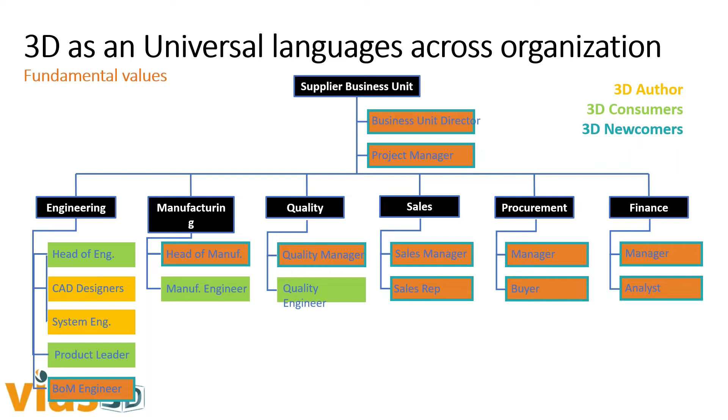And so with the 3DEXPERIENCE platform, again, it's serving these 3 groups of users. The authors are going to be able to access the files they need inside their CAD systems and quickly collaborate and search for what they need. The consumers are going to be able to use 3D, make sure it's the right up-to-date data for the decisions they have to make and the issues they have to solve.

And then we have what we call the 3D newcomers. They're not a CAD user, but they need to have the most accurate information to make those decisions. So the 3DEXPERIENCE platform addresses all these classes of users in the organization.

And so this video that we have here, we're going to be covering the 3 different scenarios. In this first video, we will see an example of how a 3D author is going to use CATIA within the 3DEXPERIENCE. They're going to be able to access it, and there's a problem that has to be adjusted: the parts within the rear suspension of this motorbike.

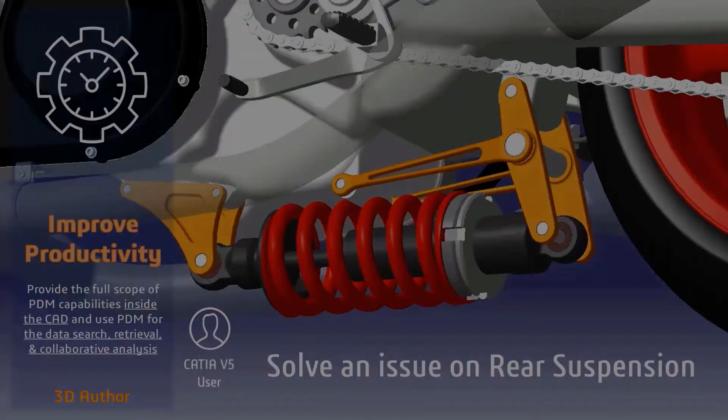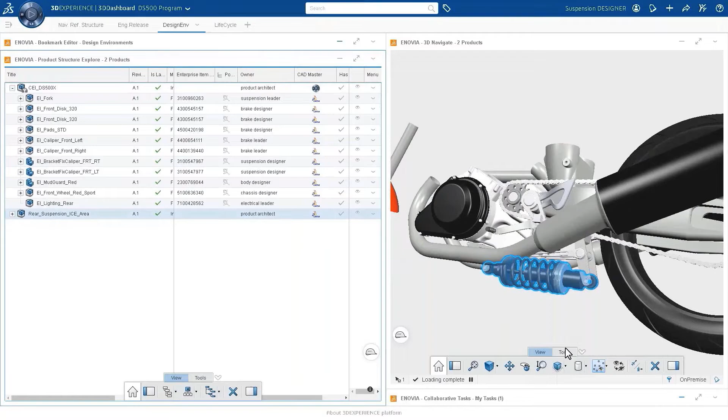So in this step, the engineer has a task to address the problem, and he has to go directly to the data in the platform to review it. So he has to drag and drop the geometry, and at that point, he can look through the product structure to navigate to the areas of concern to find the related objects. And from there, he can search through the Explorer window.

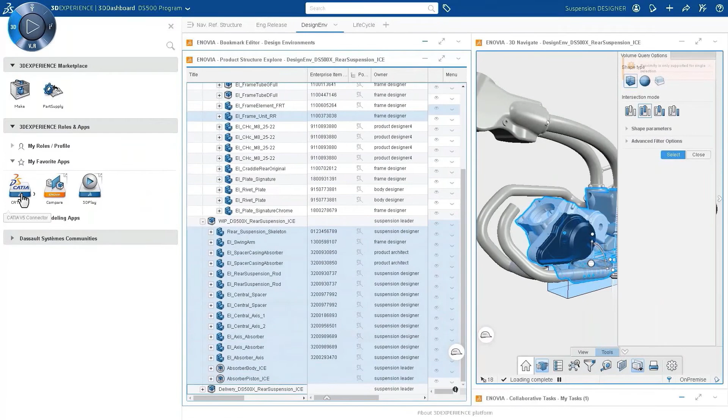And the engineer is going to be able to work in context with a volume filter. It's a powerful tool that allows them to select the components with a bounding box, and the engineer can simply launch CATIA via the app, and he's going to be prompted to select the right information inside the CATIA environment. And so now data is open in CATIA V5, and he's able to begin work. But he notices that one of the parts is not loading properly, so he has to load the new part from the 3DEXPERIENCE.

He can load and unload data from the session without having to leave CATIA to switch back. As he works through, he has visual cues in the product structure, and the engineer notices there's a spacer missing in the current session, and it's an older revision, so he needs to replace that.

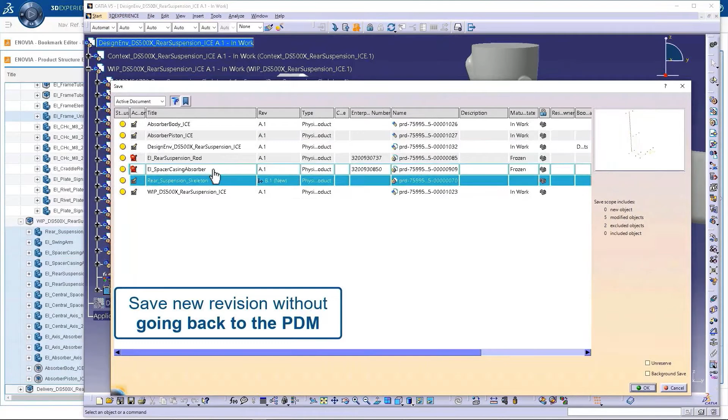The revision engineer has to identify the revisions available and update that. As a new part gets created, a new part number has to be assigned. All of this happens inside CATIA, so the information is visible immediately without having to leave the CATIA session.

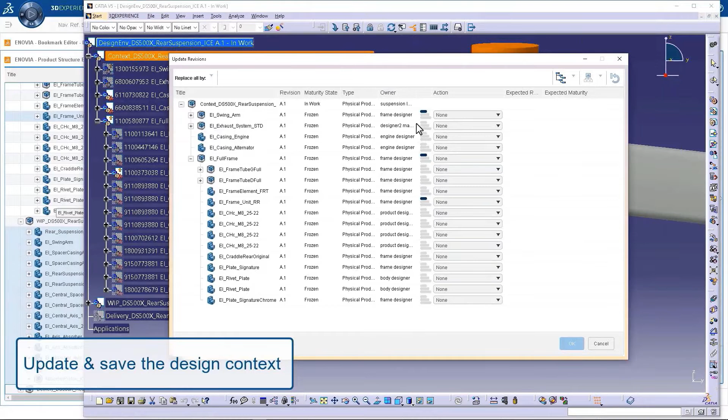Before they finalize their work, they do one last check to make sure the current context has the latest stable revision before saving everything back to the platform. They have to have a permanent record of the work done, so the engineers freeze the design, and that status goes from in-work to frozen, letting all users know this is being done for design review and is stable.

That's just a small sample of the capabilities available for the 3D authors. We have a situation where the engineer remains focused on their work without switching back and forth between CATIA and 3DEXPERIENCE, and it's seamless and trouble-free for engineers to ensure their latest changes are shared in real time with the platform.

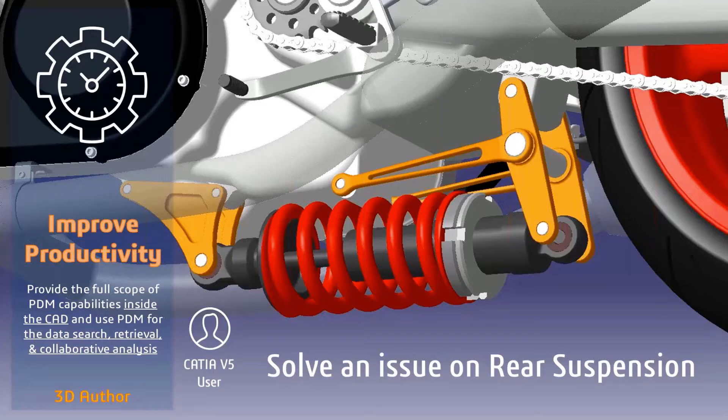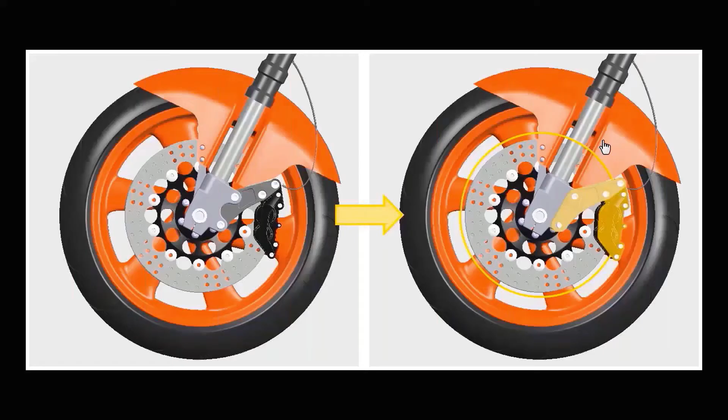In this next user, we call them the 3D consumer. They are looking at examples of how they're going to review and manipulate the data, because they have to look at the variants and the front braking.

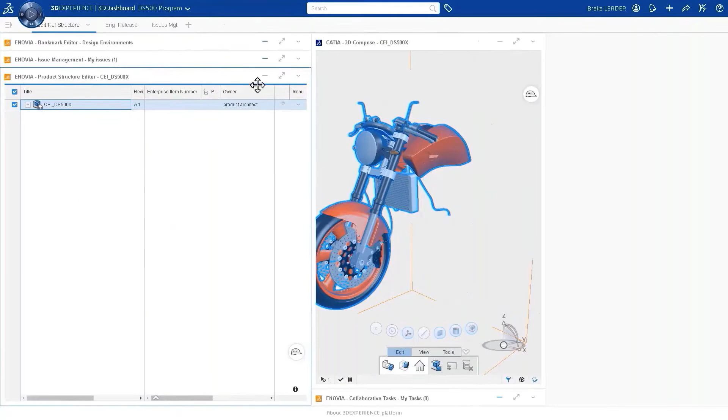A brake leader reviews the information. They look at 150% of the engineering reference and then filter the product to only the variant they need to be visible, so they can focus on the front brake disc area and surrounding components.

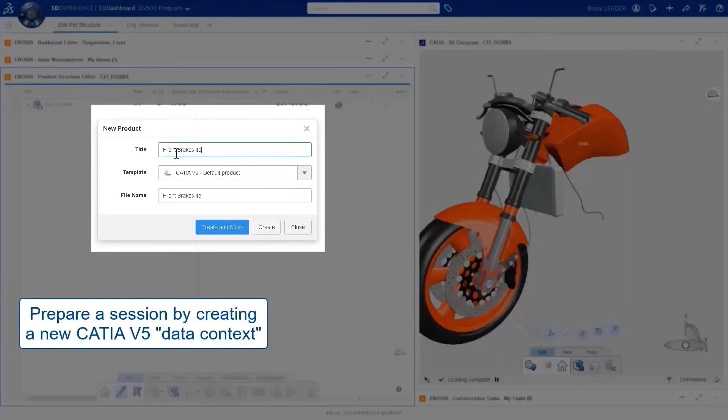The brake leader applies an additional predefined volume filter, so they're able to look between the normal version of the sport fork and the sports version of the sport fork. In 3DEXPERIENCE, bookmarking capabilities allow the brake leader to quickly locate from a catalog of parts the appropriate parts for the fork assembly.

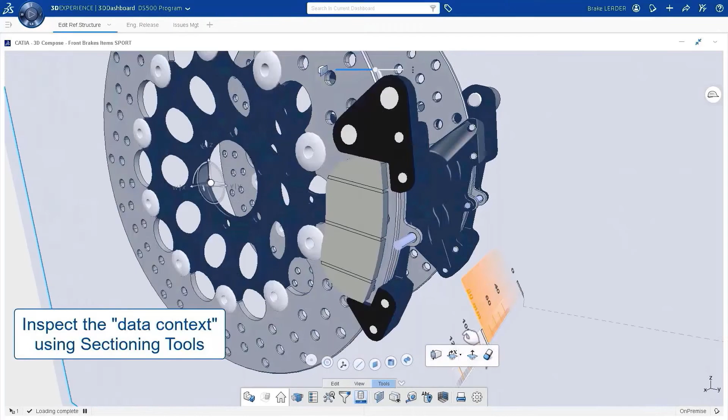As this fork assembly is added, it's not positioned correctly, so they have to drag and drop the assembly, correct it, and locate it properly. The brake leader can create a CATIA V5 product using the authoring tools within product structure.

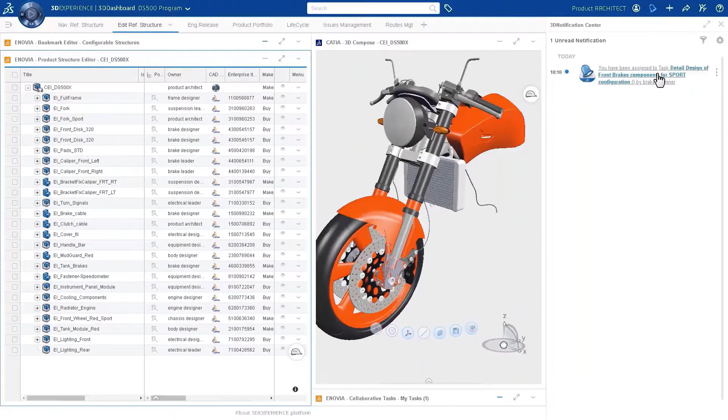They can do a combination search with 6W tags and quickly locate the new brake disc component assembly. Now that the new assembly contains all the parts needed, a quick assessment can be made.

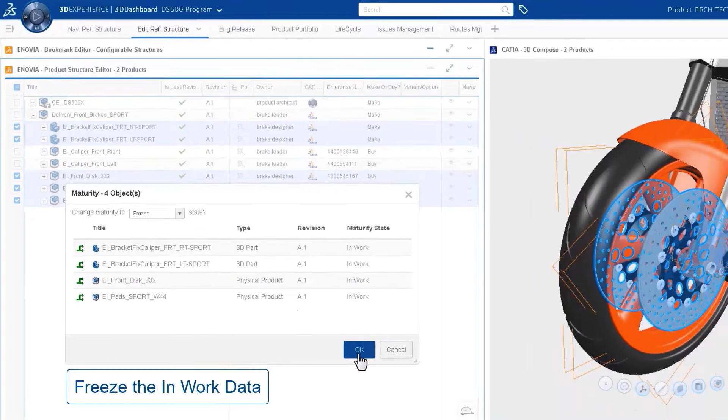We have very powerful sectioning capabilities within the 3D Compose viewer. Several interferences have been identified, and those requiring geometric investigation using CATIA can be identified as a collaborative task.

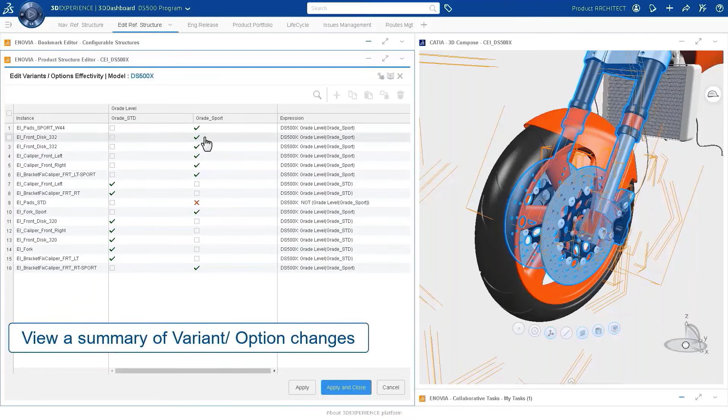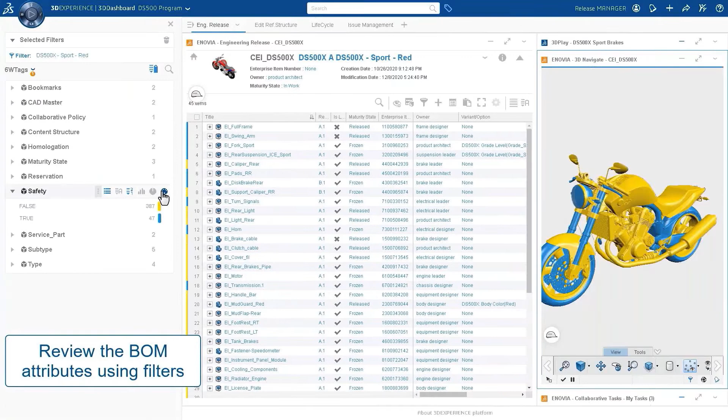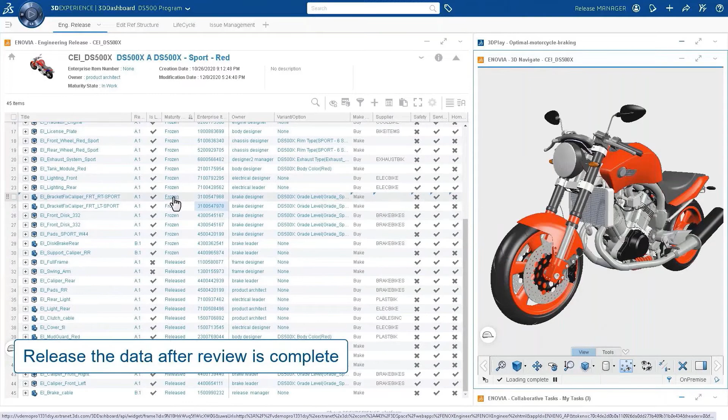So here we have the resulting new variant. The new documents can be published. The final result is the product leader freezes the design and updates the engineering reference and assembly.

So those are the three takeaways: they're able to have access to the live 3D, make accurate decisions, and push the design and revision through, all without having to leave CATIA. In this case, the 3D consumer didn't have to go into CATIA to make those recommended changes.

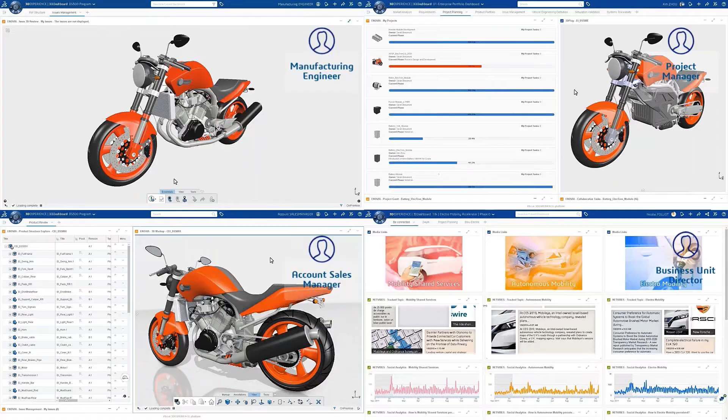The last is the 3D consumer. We're going to see several examples where they're able to manage activities and take action. The manufacturing engineer has to do a 3D issue review to oversee the current issue with the motorcycle.

The issue management widget allows them to select the brake performance issue created earlier, and in just a few clicks, they're able to interrogate and understand the status and associated data, such as related parts, markups, and conversation threads.

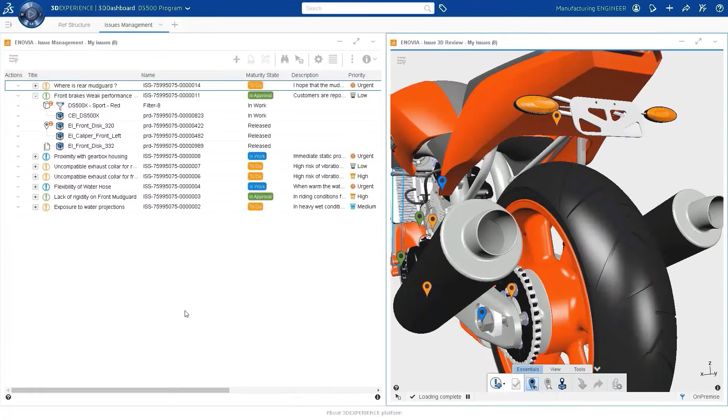The manufacturing engineer notices the rear mudguard seems to be missing and decides to create a new issue to capture his concern. Leveraging the power of 3D, he can anchor the issue to the correct location on the motorbike, select a nearby component, and suggest who should be part of the team to help resolve the issue.

To enhance the overall status, the project manager can open the project dashboard to review and understand the status of the projects, and they're interested in the new work that is progressing with the electrification of a new motorbike variant.

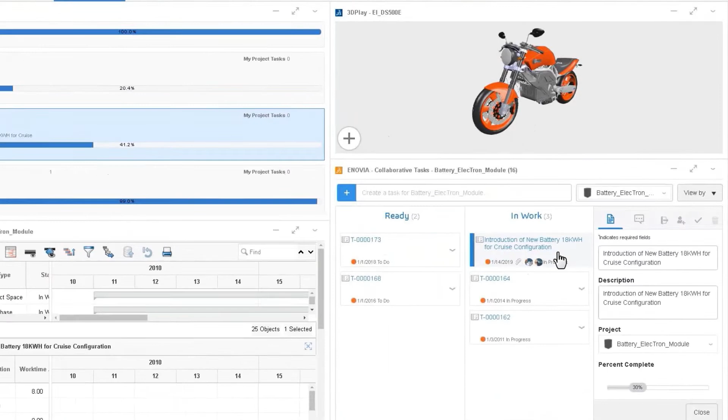The project manager decides to add one more member to one particular task and adjust each task with the members and the work allocation percentage.

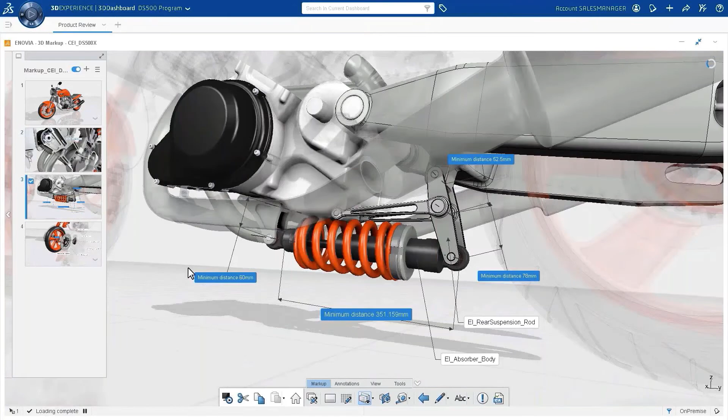The other review has to do with the sales manager getting the customer's feedback on a proposed design proposal.

While on site, the customer and the sales manager can use the 3D markup app to capture comments related to the design.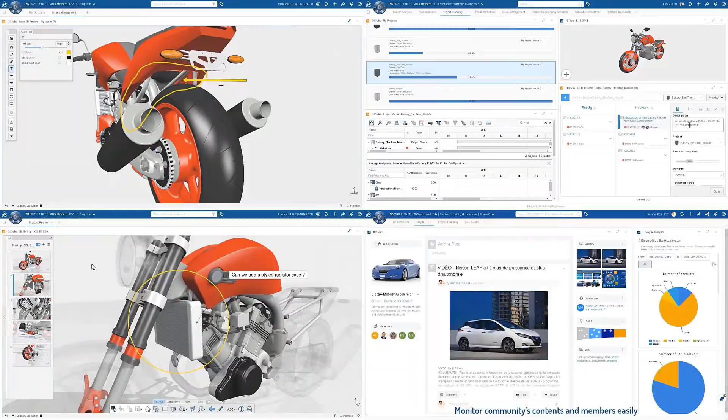So we've just seen how non-CAD users can leverage the 3D data, improve both internal and external collaboration with their customers, and have seen how 3DEXPERIENCE can provide them with a true digital collaboration platform, leveraging 3D across the organization. So what is the power to innovate?

It's important that we saw the set of capabilities that are available across the supplier, because we're now connecting the CATIA investments. So CATIA has an immersive PDM.

Second, it's inclusive because we provide a 3D basis with a web interface for designers and other stakeholders within the organization. Finally, it can be enriched, and that will be the subject of the next slide, where we can really open the door to see many different process-oriented roles enhanced by the 3DEXPERIENCE platform.

So what are these downstream values that we speak of? Well, the first is important to note that it's not only CATIA anymore. You can have other CAD connected in the same way, and suppliers have on average 2 to 3 different CAD systems that they're using to manage their customers' information. Being able to have multiple CADs in the one system is going to be of benefit.